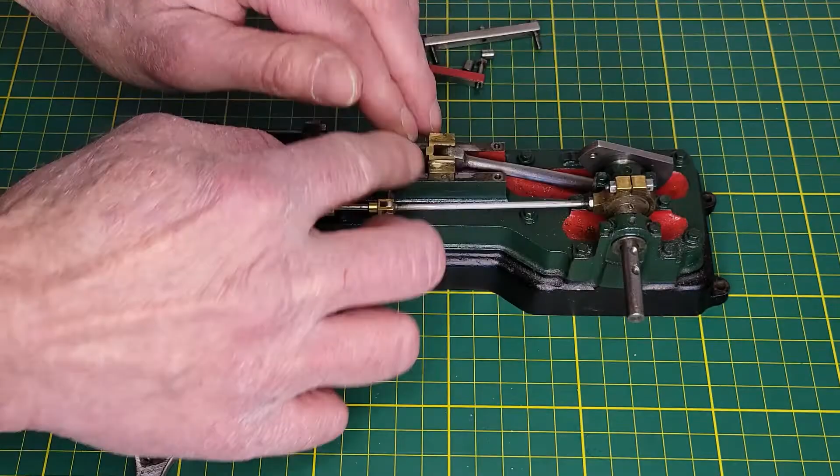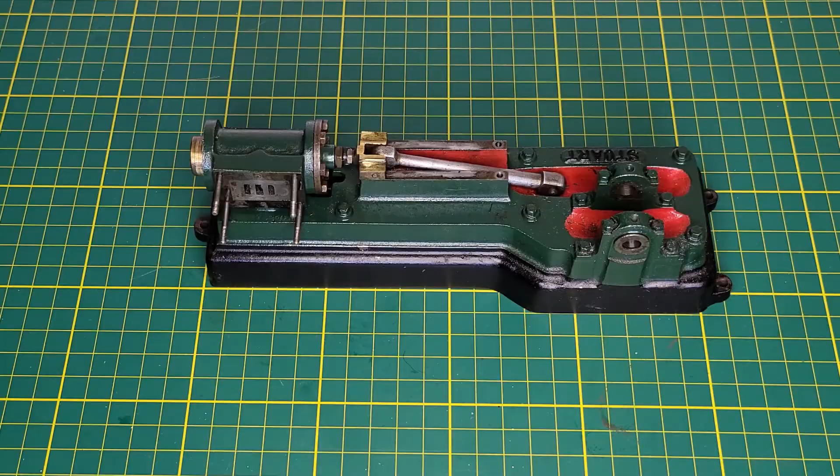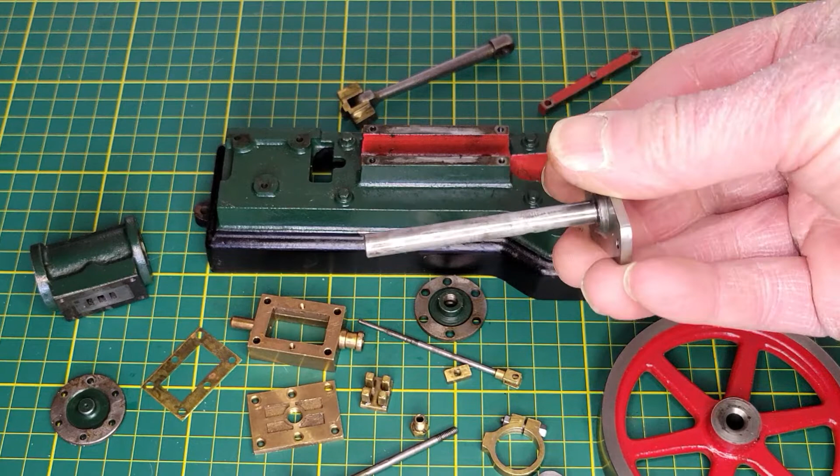So there we have it. No major surprises on anything I found taking this apart. The crank is maybe a little bit worse than I was expecting. It looks like they couldn't really figure out where to put the holes and flats for the eccentric and the crank or the flywheel, so this is definitely going to have to be remade.

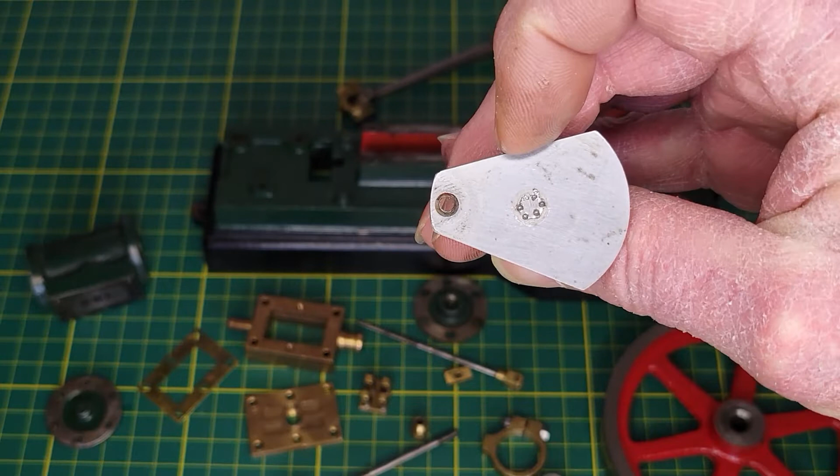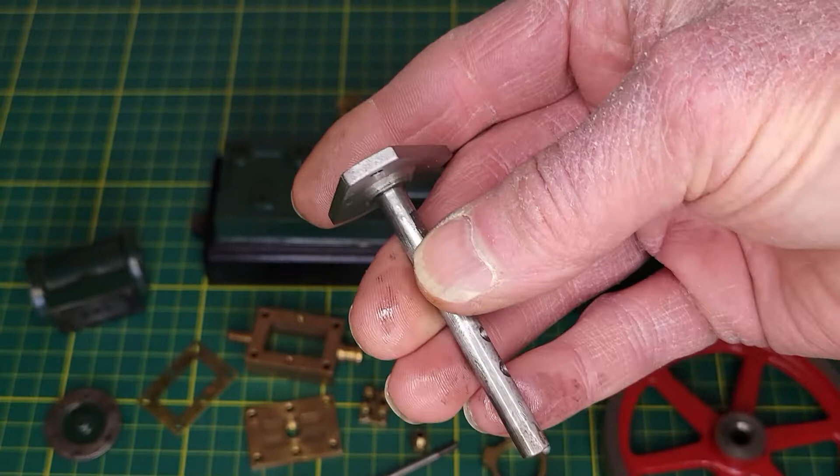I may change up the design a little bit on this crank disc. I've seen them where they're completely round or where they're more cutaway, instead of the tapered angles, more of a flat with a counterweight on the backside. Remains to be seen what I end up actually doing, but I will definitely be remaking this piece based on what I'm seeing here.

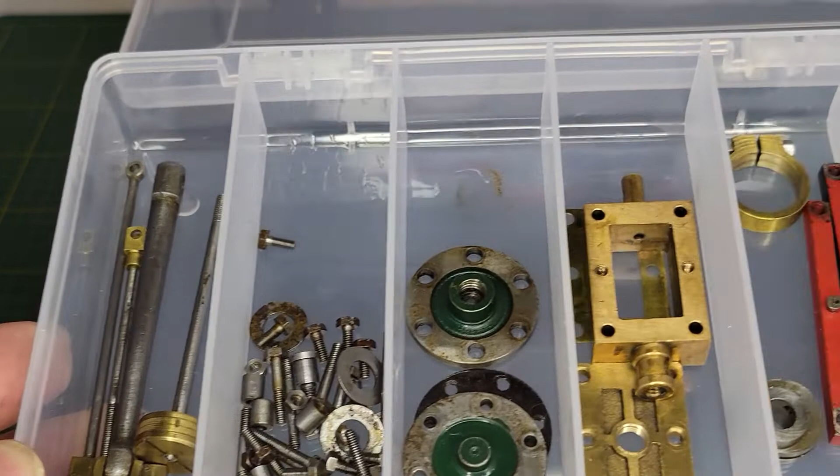Let's go ahead and inspect some of these other parts to see what kind of shape they're in and what work I'm going to have to do to them. For the most part, all of these small parts on the engine are in good shape and within specifications of the plans. The piston is about 20 thousandths undersized, which I expected, so that will have to be remade. The rest, I think, just need to be cleaned up. From what I've measured, everything is pretty close to the drawings as far as dimensions and specs go.

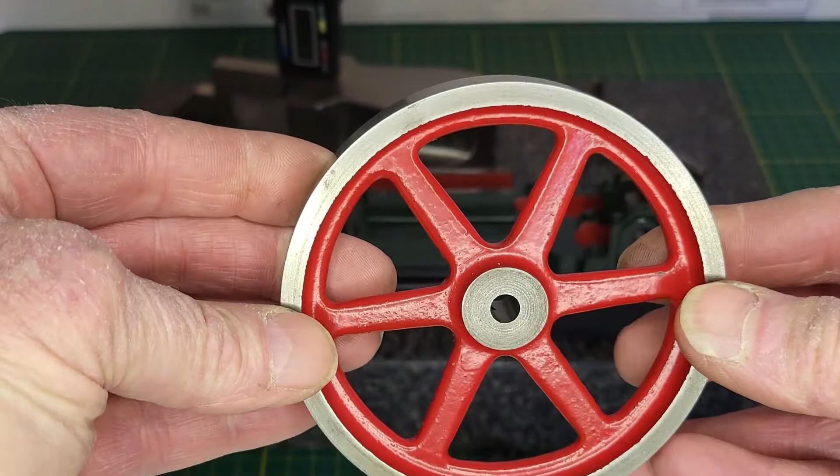The flywheel is very nice. The paint is good, everything else looks really good on it. The dimensions are correct according to the plans. It needs a little bit of polish on the rim. Other than that, it's good to go.

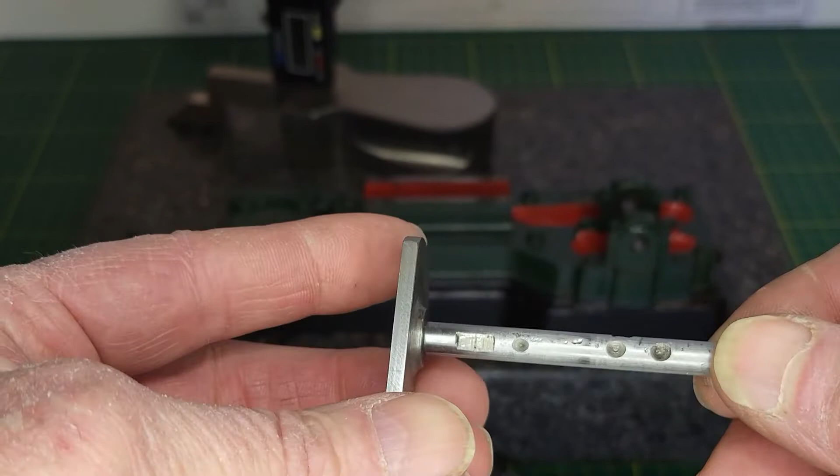We've already looked at the crank disc and crankshaft here. This will have to be remade. There's nothing on this that I like.

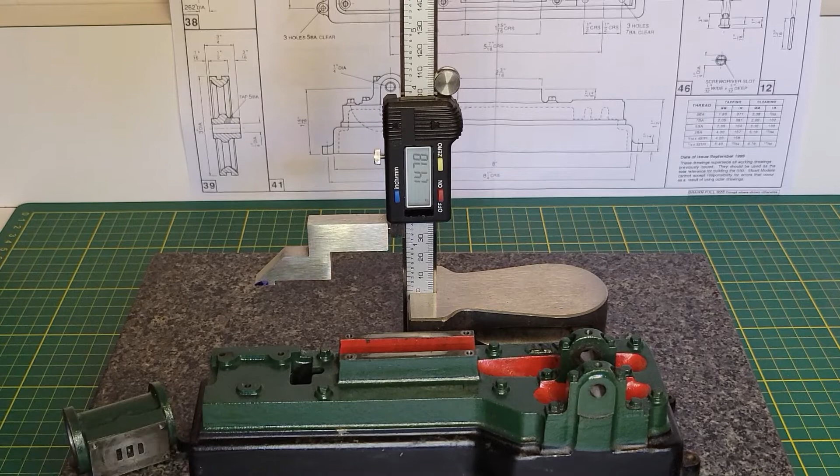Okay, this surface on the base, according to the plans, is supposed to be 1.5 inches above the bottom line here. On this engine, it is 1.474, 1.470, 1.478. So it's a little lower than it's supposed to be according to the plans.

I don't think we can do anything to correct that, so we'll have to adjust the 20 thousandths or so that it's off on a different part.

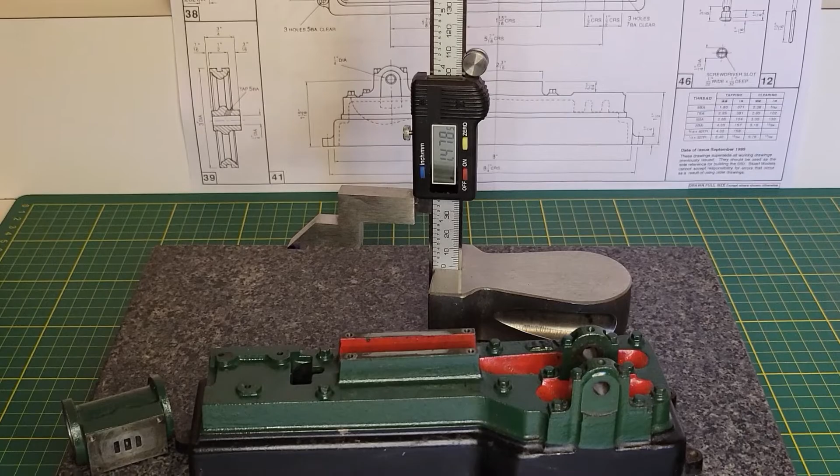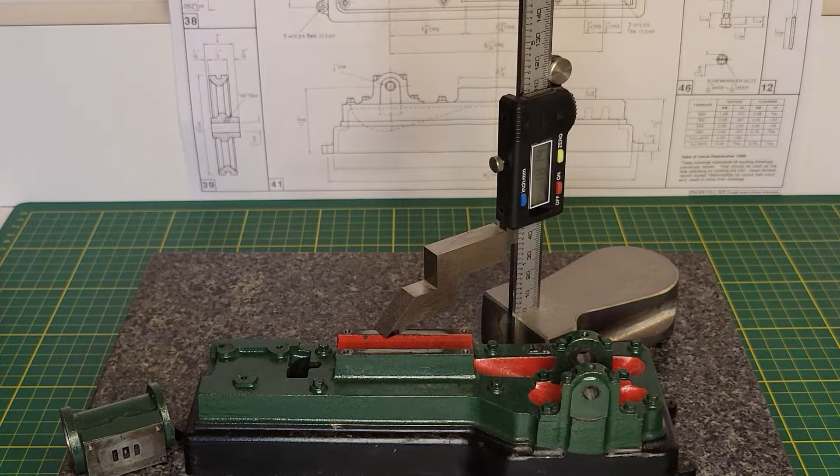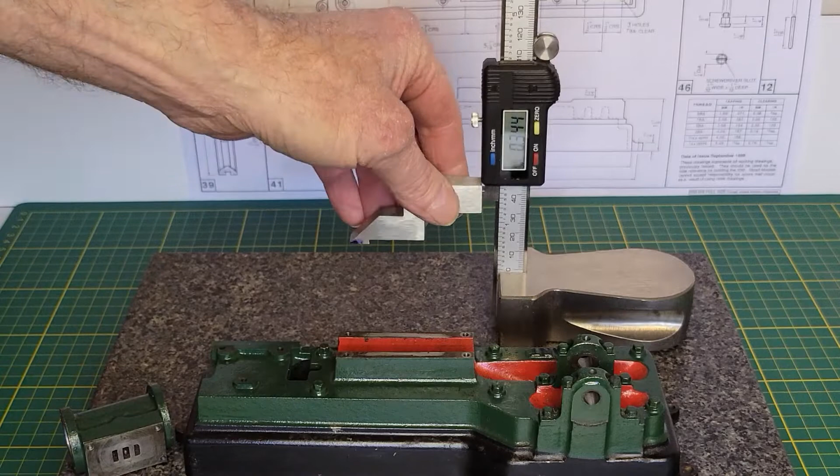The surface of the guide rails are supposed to be 21/64 higher than this surface. 21/64 is 0.328. So let's see what we've got here. That one is at 0.344. 0.341. So they are a little bit higher than they should be in relation to this surface.

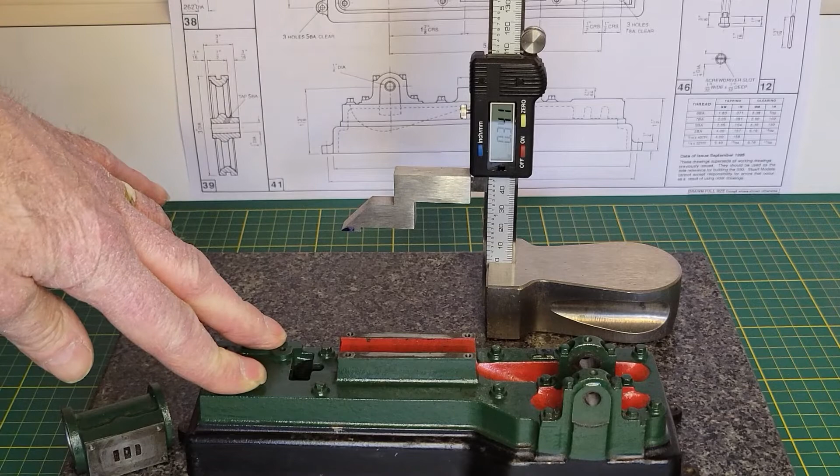But I don't think it's going to be an issue. The through holes for the crankshaft are approximately 28 thousandths too low down to the bottom. So I think that as long as we're pretty consistent with these holes being too low, this being too low, this being too low, as long as we're pretty consistent in how much they are too low, we shouldn't have any issues.

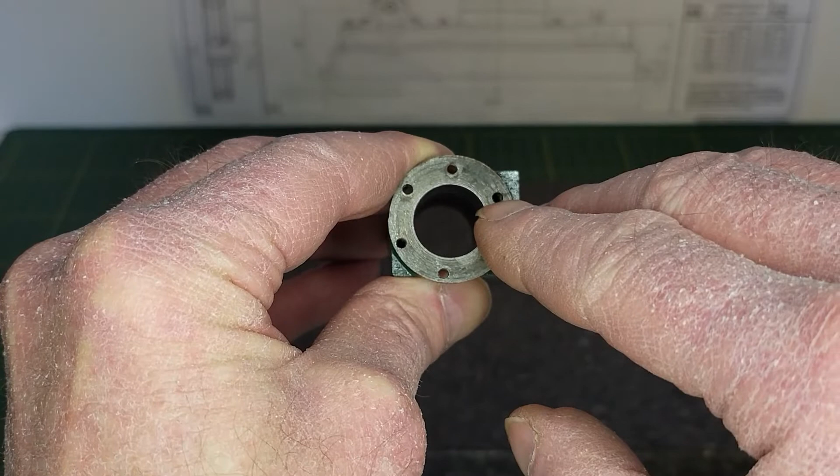These holes that mount the cylinder covers are not drilled where they should be. This hole and this hole should be exactly vertical of each other, and the whole thing is rotated a little bit this way, which means that where you have to drill through to connect the steam chest to the cylinder comes very close to this hole that's drilled and tapped.

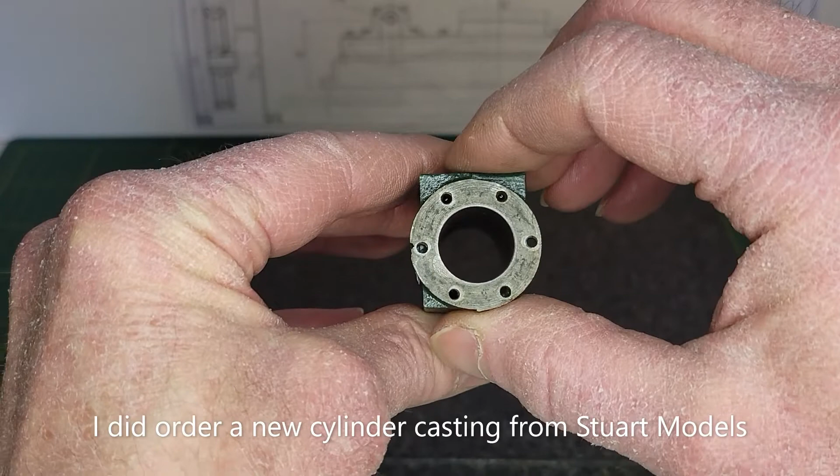I may end up plugging and re-drilling and re-tapping all these holes, but due to the other issues I'm seeing with this, I might just go ahead and order a new cylinder casting from Stuart. We'll have to see how I decide to take care of this problem. The bore itself is good, it's within a half a thousandth of being 0.625 from what I've been able to measure.